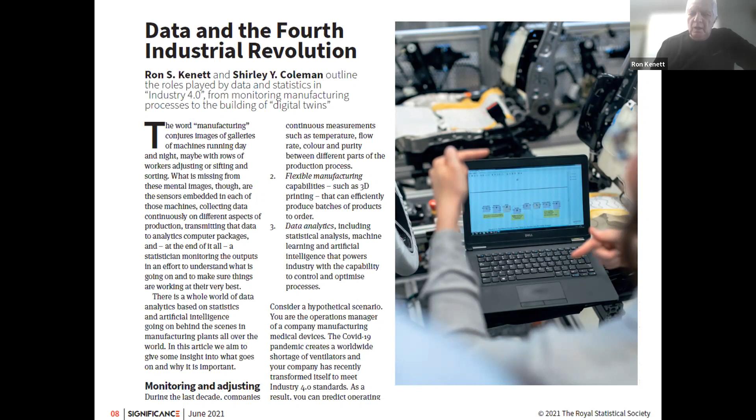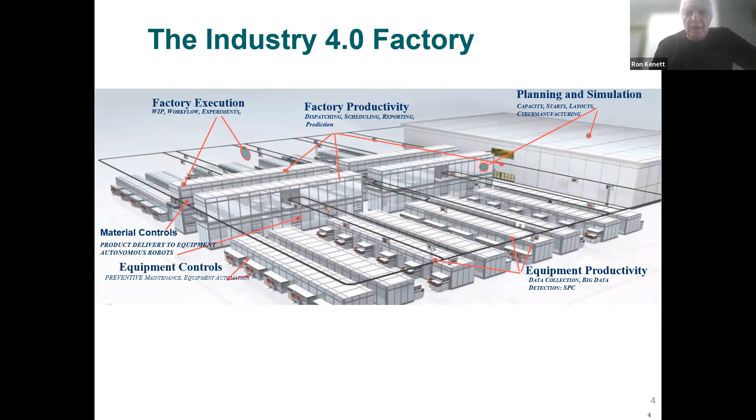We are in this fourth industrial revolution, which really means that we are now looking at the factory as a data generator. So where is the data coming from? It's coming from our ability to track production, to track equipment usage, to track material, incoming material. And the way the modern factory is described is using this term of cyber manufacturing. Siemens 15 years ago talked about cyber physical systems. So now we talk about cyber manufacturing.

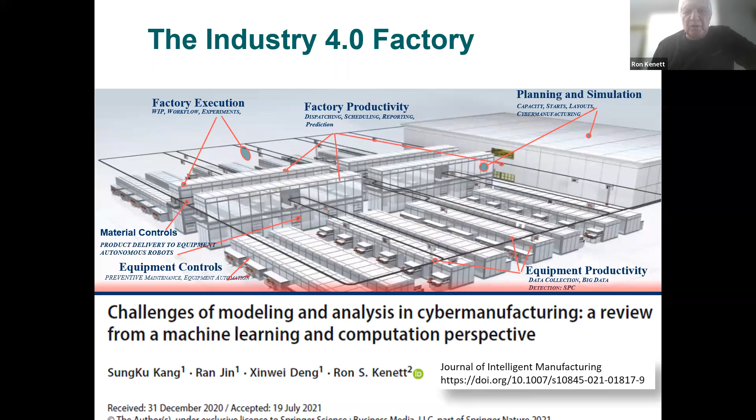This is a recent paper which is reviewing challenges in cyber manufacturing from the modeling and analytic perspective. This is not what I'm going to talk about now, but this is a background for what I'm going to talk about now. So if we look at Industry 4.0, where is the analytics? It's in maintenance, it's in fault detection, it's in forecasting, it's in process control. It's basically in 4 fundamental capabilities.

So where is the analytics? The analytics is in monitoring. We have now capabilities for enhanced monitoring. It's in diagnostics. When monitoring raises a flag, we can figure out why this happened. So this is related to explainability and generalizability of models. We have prognostics analytic capabilities. Okay, this happened because of this. What's going to happen next? And optimization or prescriptive analytics. So the way I summarize the different types of analytic capabilities is in these four terms: monitoring, diagnostic, prognostics, and prescriptive.

There are many suppliers of IT tools that are now supporting the Industry 4 ecosystem. So this is MES, PAT in the pharma industry, LIMS, data historians, and the providers of these tools, they want to sell tools. These tools combine analytics, but it's very important to keep an objective view on what are the problems. And this leads to a different perspective from the tools providers.

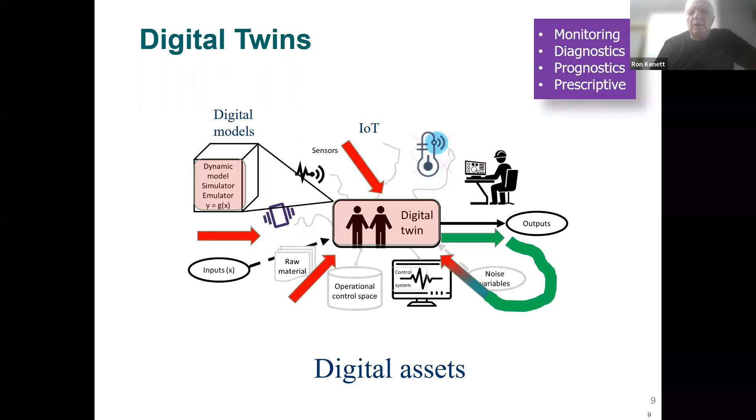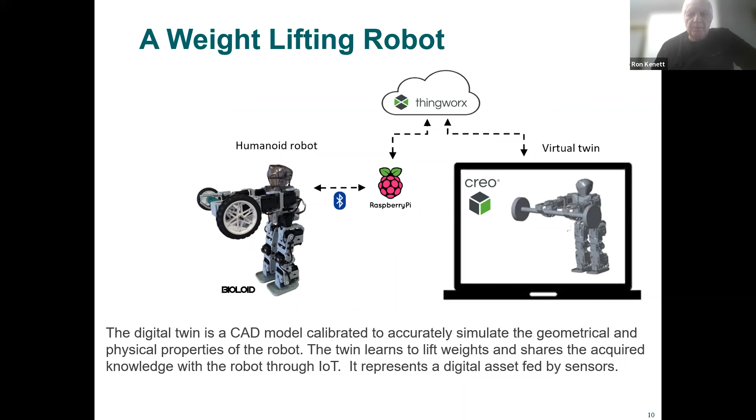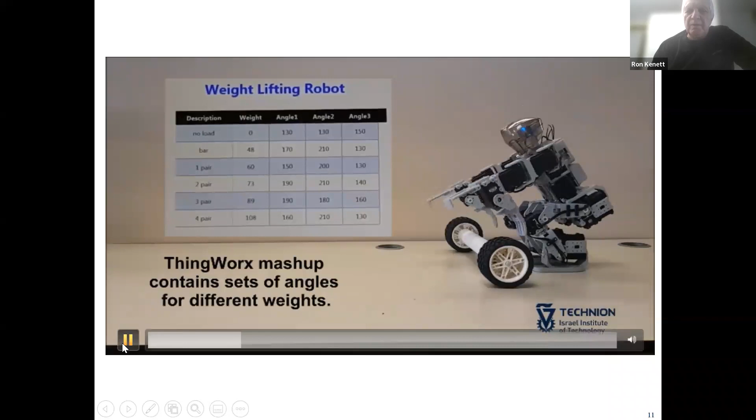So what we have is basically a set of experiments. The robot is making some measurements, is figuring out what is the weight that it needs to pick up. And based on this information and the model that has been used to represent the task, the robot is now executing the weightlifting exercise. So this is a simple robot. This is a simple task.

What analytics does it involve? So you can think immediately that this would involve designing experiments. How do you run the experiments to make these initial weights? This involves monitoring. How do we track the performance of the robot? If there is an issue with the performance of the robot, why did this happen? What angle needs to be corrected? And we need some diagnostics.

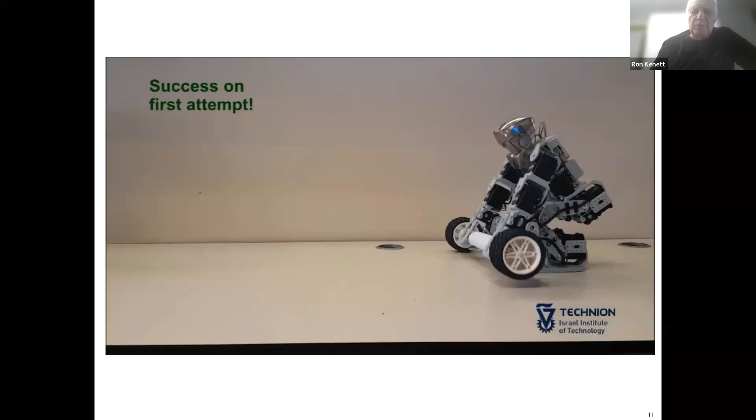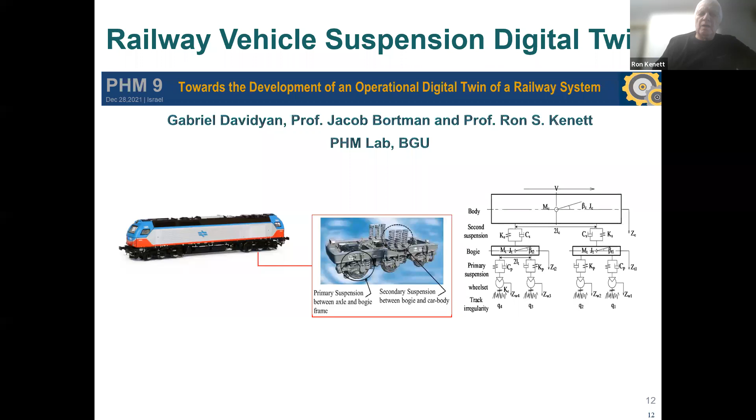So we have the physical, the mechanistic model of this suspension system. The faults that are of concern are called wheel flats. You can see the picture of the wheel flat. The bigger the wheel flat, the more problems the suspension system will have in running in terms of the expected performance. What we are doing is, because it's a revolving wheel, we are doing an angular resampling of the data, which is a transformation of the time dimension.

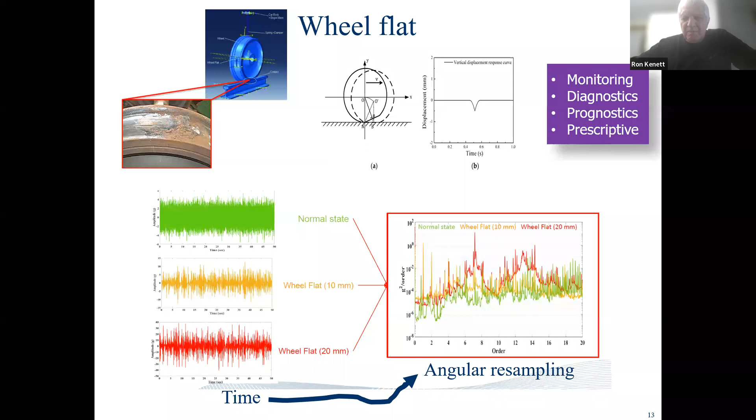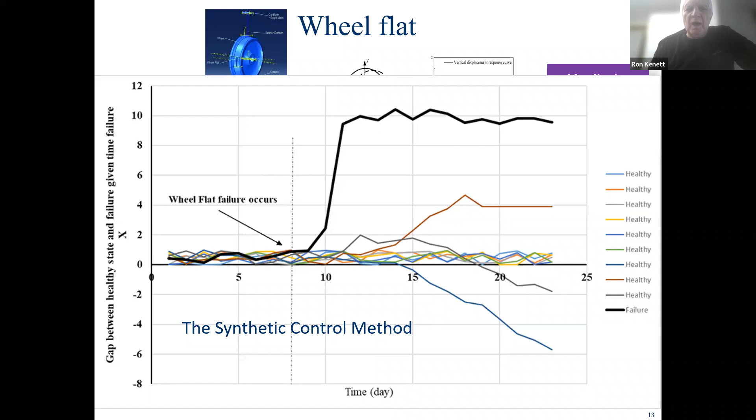And on the digital twin, we can model the different levels of wheel flat, 10 millimeters, 20 millimeters, and with something called synthetic control methods, we can compare the current performance with the healthy performance and determine the causal effect of the wheel flat on the vibration, which is what is modeled in the digital twin of the suspension system. Another model that is studied, developed by this student, relates to safety valves.

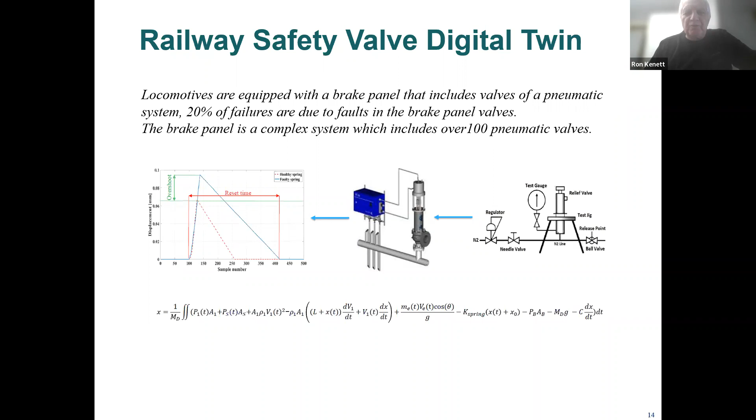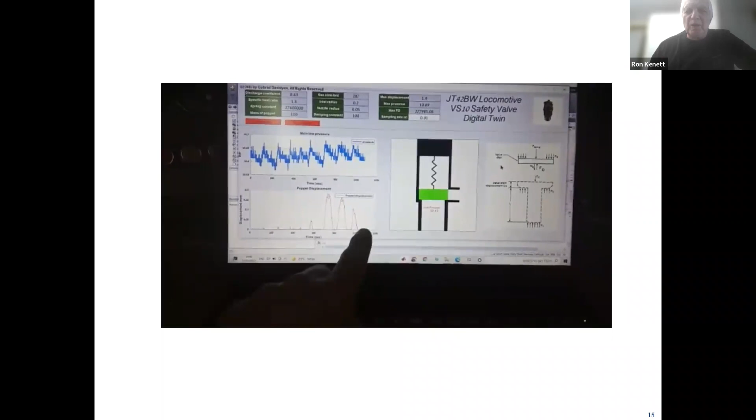In a locomotive, you have over 100 such valves. And on the Pareto, this is the main cause of failures. 20% of failures are due to faults in brake panel valves. So this is the engineering description of the valve. And the digital twin that is using vibration is feeding some cloud data. You can see what is done in an ongoing way to track the performance of each running locomotive in terms of performance of these safety valves.

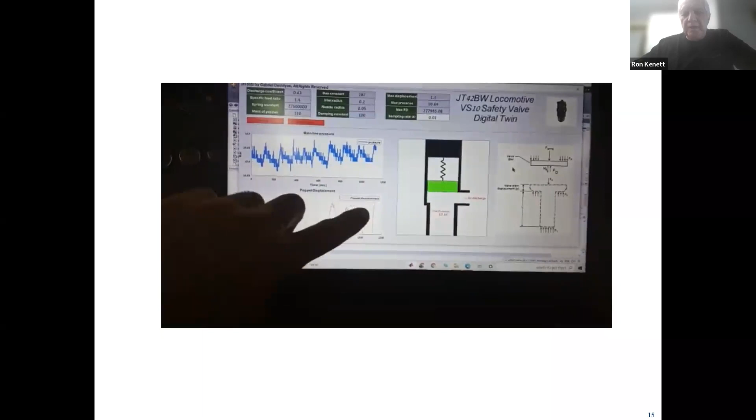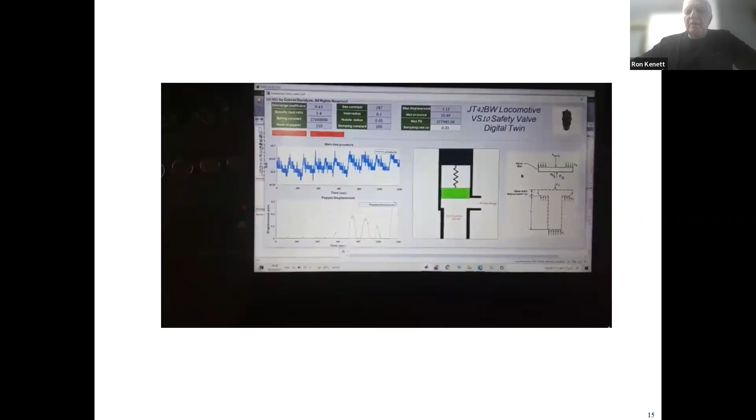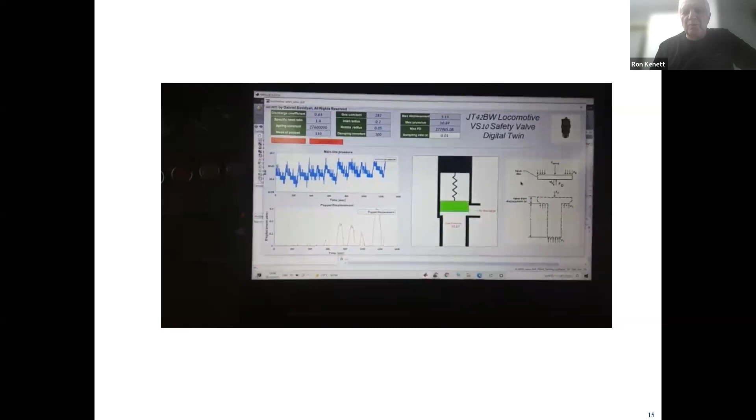This has been revolutionary. They are now tracking performance in locomotives that are running, and this has changed completely the way maintenance is done, and has greatly improved the performance of the locomotives and reduced the maintenance work actually.

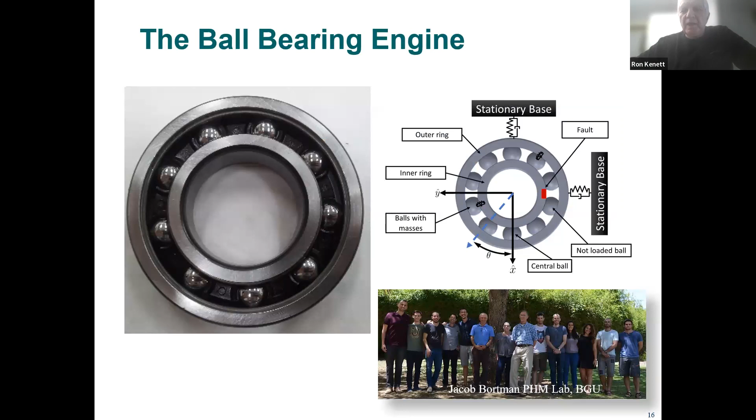In revolving engines, like ball bearing engines, Bortman in his lab at Ben Gurion has developed many models to track faults. So we have a base, and the ball bearing engine is rotating. When there is a fault, you can see how the accelerometer, the vibration picked up from the sensor, is picking up the faults on the outer race of the ball bearing engine. What you see here is not time, but revolution. So order means revolutions. The first revolution, second revolution. So this is the angular resampling I mentioned.

And it turns out that if you run this type of analysis on time, you are getting much worse performance. So this understanding that this is using revolutions, that by analyzing data accounting for these revolutions you improve your ability to monitor and diagnose and make prognostics, has been quite critical.

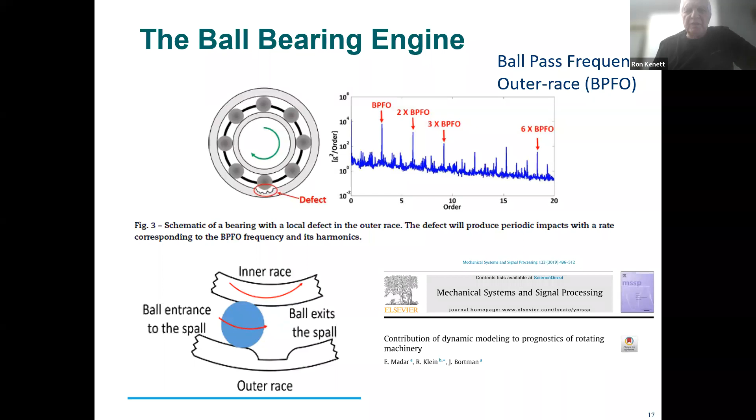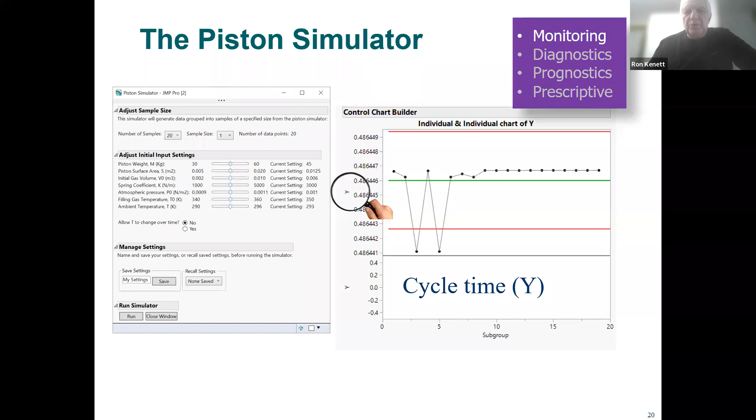And if we track cycle time, on the left, you see the panel for the JMP version of the simulator. For some data, we see it's going up and down, and then it sort of stabilizes. Okay, something happened. We also figure out that the initial gas volume changed. So from a certain number, it increased. Is this why the cycle time changed?

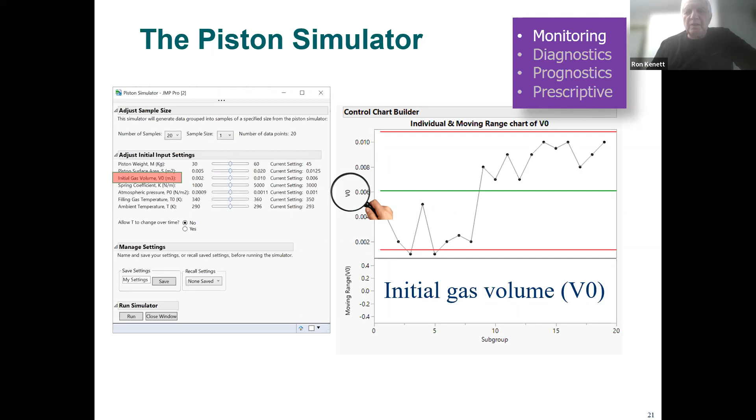Because it's a simulator, we can run computer experiments. For example, we can apply a Latin hypercube, and this is designed by JMP. So this is a simulator. We can do this, it's free of charge, doesn't cost anything. These are not experiments that are physical, these are simulated experiments.

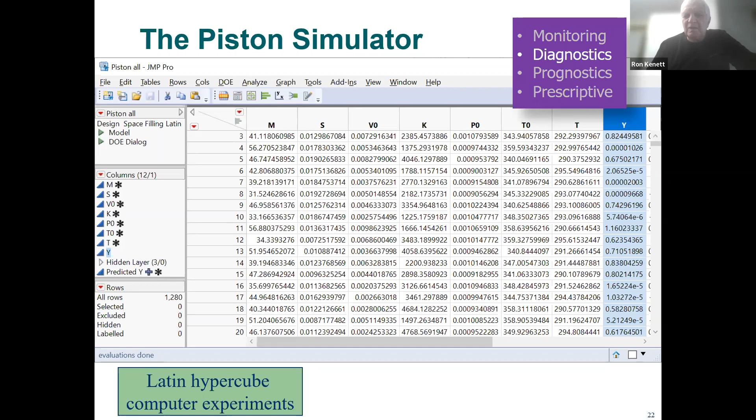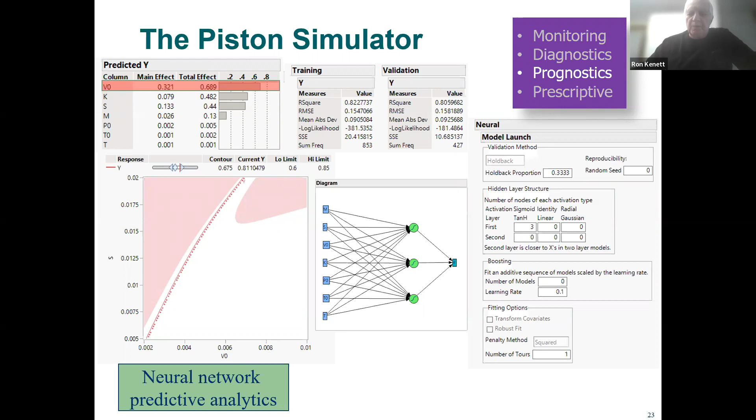With the data, we can use a neural network to model the impact of the factors. And indeed, the initial gas volume is the most important variable. So in terms of variable importance and in terms of explainability, it is what is seemingly affecting cycle time the most. We can now start doing some predictive analytics. We've seen that this initial gas volume has increased. Where is it going? We can see a huge uncertainty.

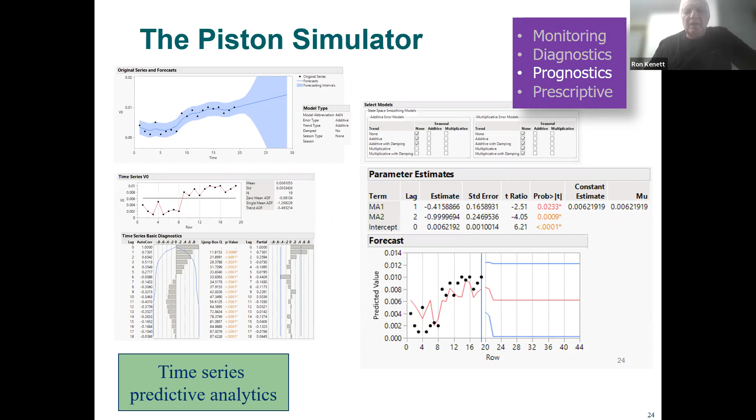What can we do to optimize? Here we apply something called a stochastic emulator. This is described in chapter 13 of that book. The idea is that the Latin hypercube or any model gives you an ability to map the average response, in this case, the cycle time response. If you run another experiment, a computer experiment on this emulator, you can also model the variability. This is what we call the stochastic emulator.

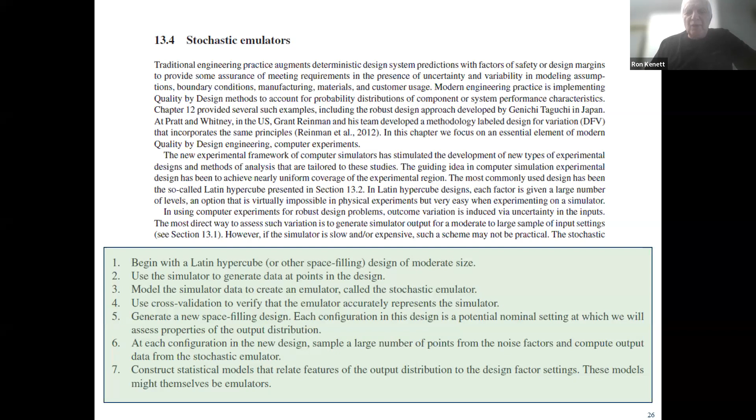So now if you combine the optimization of the emulator and the optimization of the stochastic emulator, instead of getting a solution which is optimized on the peak, you will be able to get a robust solution. In this case, if you optimize on the peak and you introduce variability in the inputs, it is a really high peak, because 42% of the time with this introduced variability, you're going to fall off the cliff. This is the failure rate that you will experience.

If we optimize also on the stochastic emulator, we get a much more robust solution. It's a flat area, and by changing the setup of the piston, we are now experiencing only 1% defect rate. So by giving students the opportunity to run experiments on a piston simulator, you can teach design of experiments, you can teach process control, you can teach process optimization, you can teach computer experiments, and you can teach the application of stochastic emulators.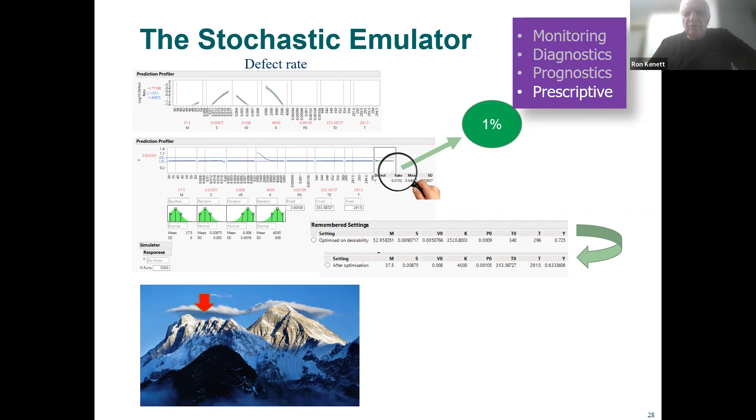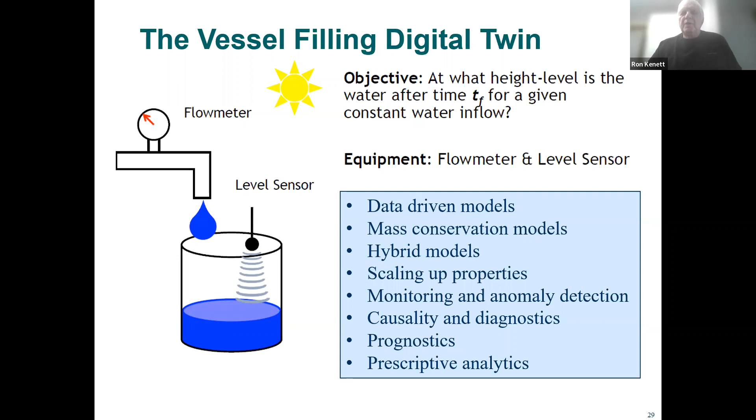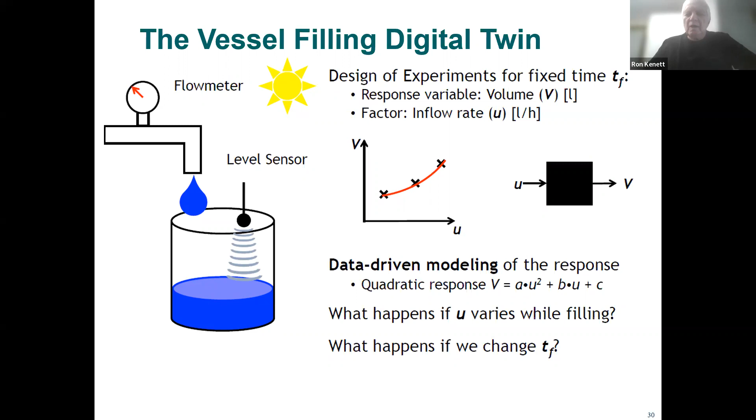We have the height level of the water at time t, the volume V and the inflow rate U, which are obviously correlated. A black box approach would model this with a quadratic model. Okay, this is why it's a black box. It's an empirical data-driven model. We can apply mass conservation. Now it's a white box, which will give us how volume is changing

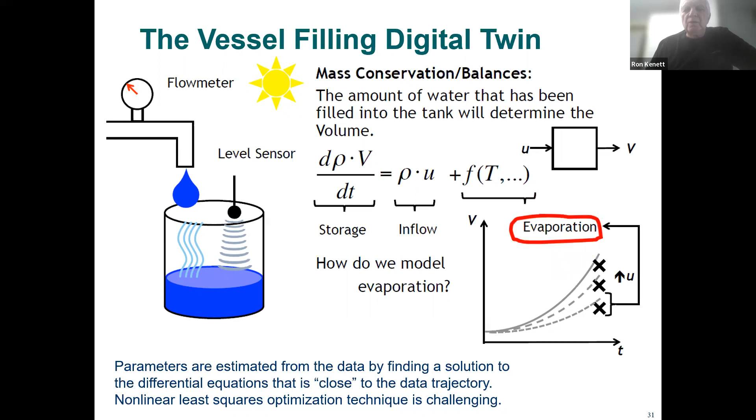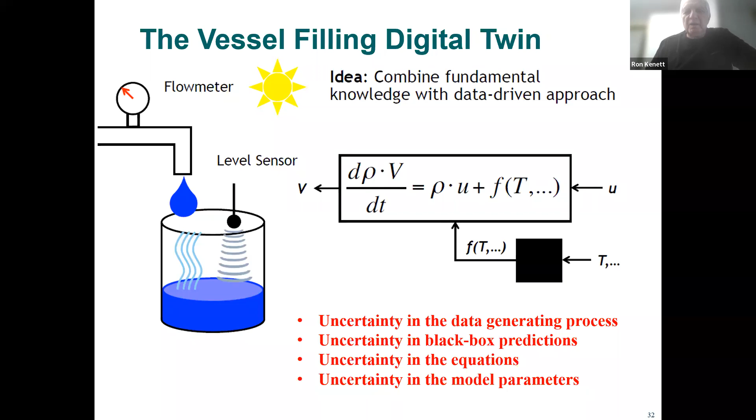with respect to inflow. And then we can try and match, in a specific case, the solution to this differential equation. And then we can see also some discrepancies, and some of the reasons for that might be evaporation. For evaporation, we don't have a model. So what we can do is combine a black box, which will allow us to handle the discrepancy in the model in a real experiment from the theoretical balance conservation-based model. And by doing that, we are basically running what we call a hybrid model. So it has a mechanistic element and it has an empirical element.

To evaluate these models, we can conduct sensitivity analysis. We can discuss generalizability. What will happen if we change the inflow, if we change the time, if we change the scale, if we do a scale-up study. We can discuss interpretability. We can discuss causality. So basically, we have a model, and we want to assess the model.

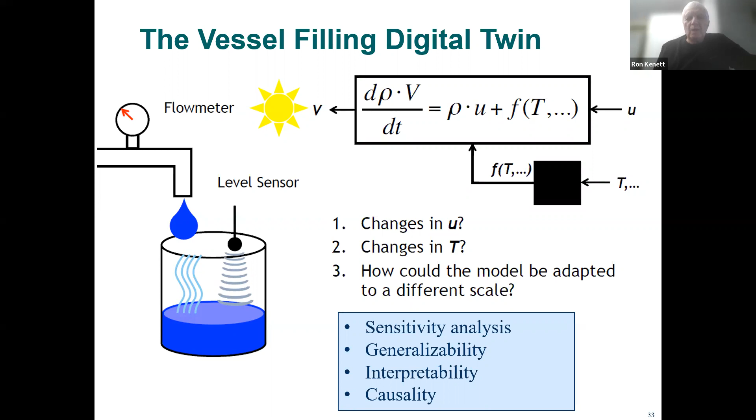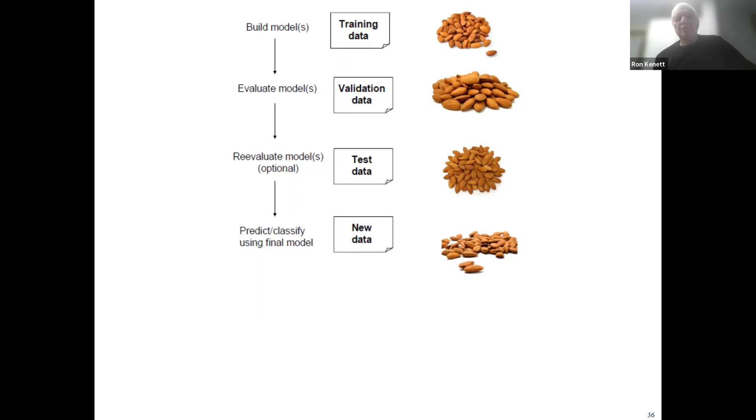So yes, we talk about data, but eventually the main point should be information. And if that's the main point, we should be focused on information quality. So this is what this wider perspective consists of. In predictive analytics, we have an algorithmic perception on how to build models as opposed to the stochastics of the data generation process. So we have the training data, the validation data, and the test data. Sometimes we have just training and validation, and then we have new data.

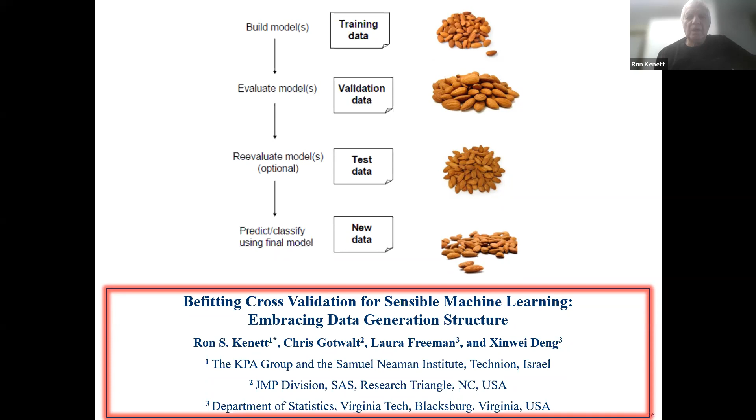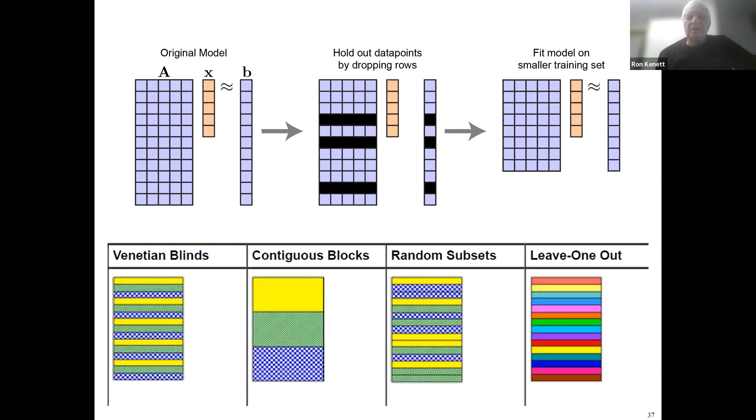In figuring out what happens in this context, we have a recent paper called Befitting Cross-Validation, and I'll give you the highlights of that. In the holdout set, we're going to take some random rows and keep them in the drawer, and we'll use those for validation. However, there are different methods available. There are other automatic methods, Venetian blinds, contiguous blocks, random subset, leave one out, jackknifing type methods. So the cross-validation story is more complex than usually considered.

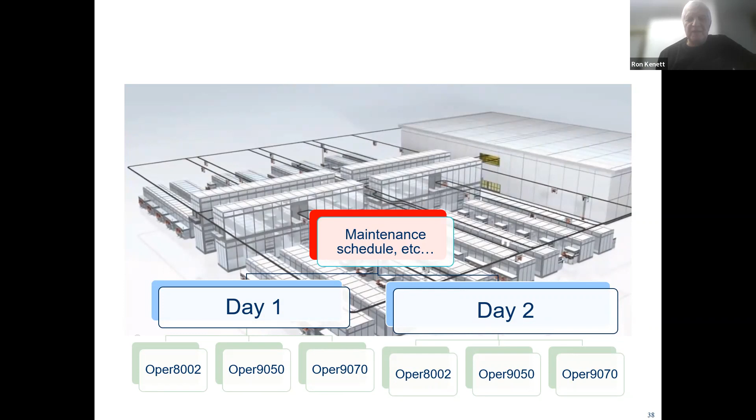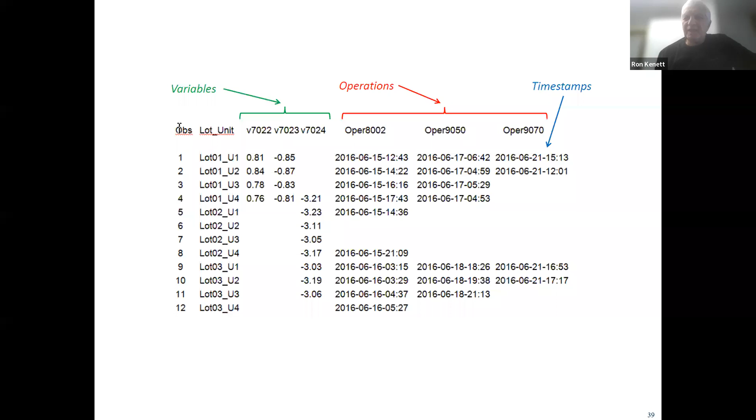If we go back to the factory plant, the data we have is structured. So we have a schedule for maintenance that affects the plant. We have data by shift or by day, by system. And if we're going to model this data with predictive analytics, we need to respect the structure in the data so that we can generalize the findings of the predictive analytics. Art Owen has a very nice paper and a YouTube talk on different structures in data. So we have rows nested in columns, columns nested in rows, balanced data, IID data, random data.

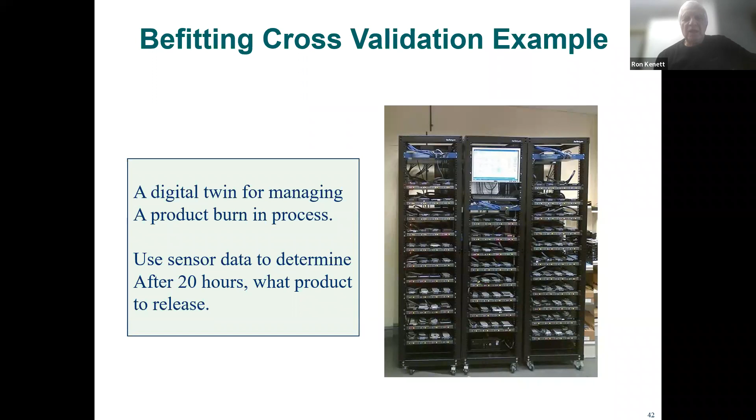I'm going to give you an example. This is a rack of drives that are going through what is called burn-in. So the company that is producing them is trying to reduce infant mortality by running these drives in these conditions. And the producer of these drives wanted to shorten the burn-in time. So using sensor data, the question is, can we determine after 20 hours what product to release?

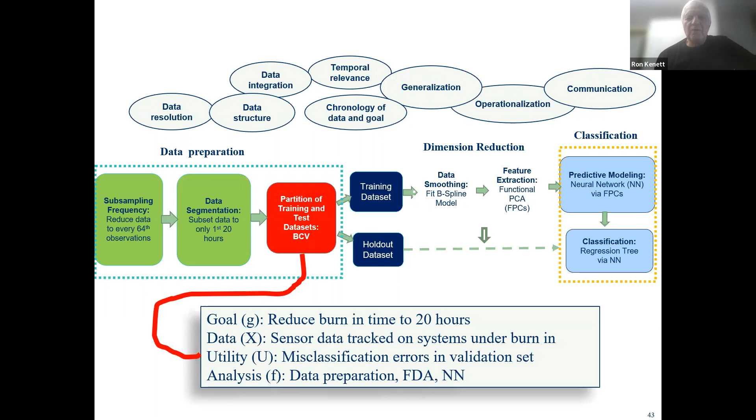And this is the data flow that we've used, and it includes this befitting cross-validation, which is what really made a difference. So I'm going to go over the case study. This is the general data flow for the analysis. So we have 92 units. We are able to track them up to about 100 hours. This is the way these burn-in systems have been set up initially.

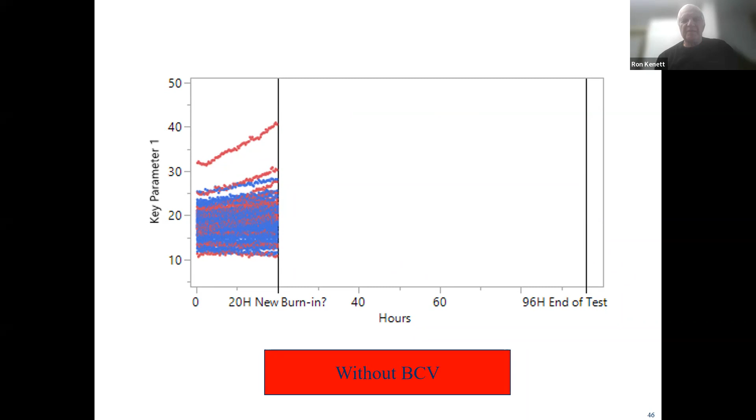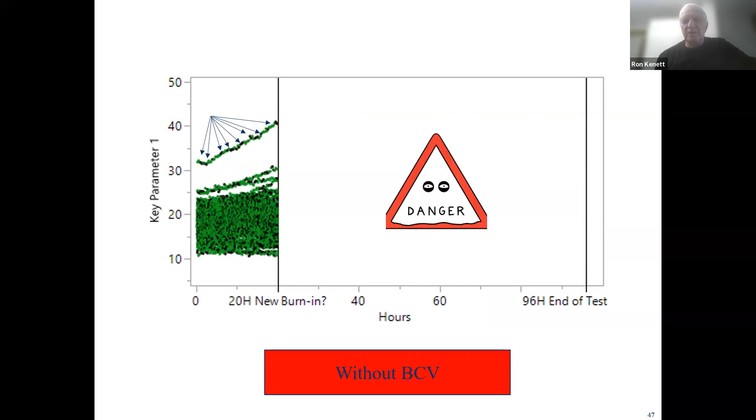We want to figure out at 20 hours what's going on. If we don't apply BCV and we just run a regular cross-validation, we're going to get points all over. We obviously are missing the characteristic of the data, and this is obviously a big danger, because the data is really tracked by units, and some units pass, some units fail.

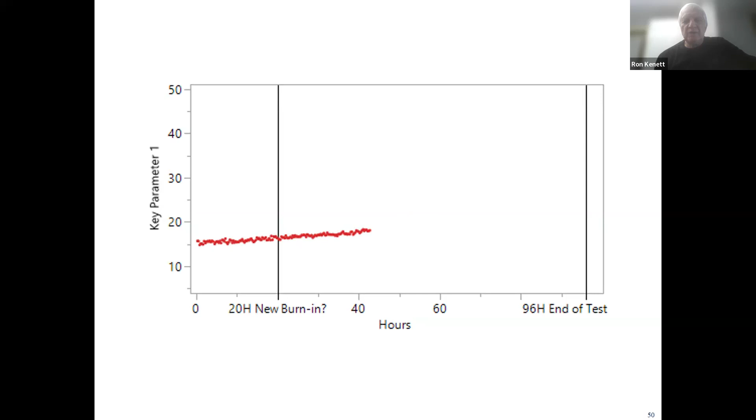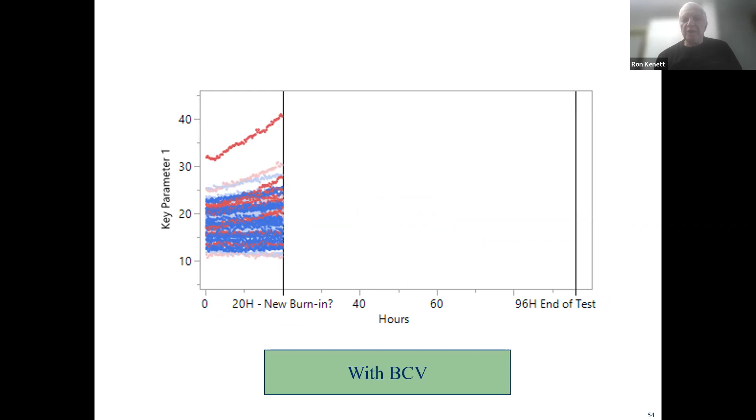And in running the cross-validation, we need to stratify the cross-validation by unit and make sure that what we are going to see is relevant to a unit and not just to a data point. We are using here penalized splines, which give us a functional data analysis perspective on this data. On these models, we can now conduct some model. We have some predictive analytic models.

The analysis now is using the model that we got from this penalized spline on the trajectory of the drivers. And we have several sensors. Here you can see that we use the functional principal component, the first two of a key parameter called key parameter 1. We actually had more than one key parameter. We have the condition of the driver, passed or fail. This is from the data. We have the cross-validation that is accounting for the structure in the data.

So the validation column is splitting the data into training and validation set. On the training, we apply a neural network to predict the outcome of the driver under test. This is a decision tree perspective, or regression tree actually. And what we end up with in the validation set is almost perfect performance, so that applying befitting cross-validation to this analytic model, we can show the customer that at 20 hours, we give them a rule to decide on whether to stop or continue the burn-in, which obviously they were happy because it saves them 80 hours of testing.